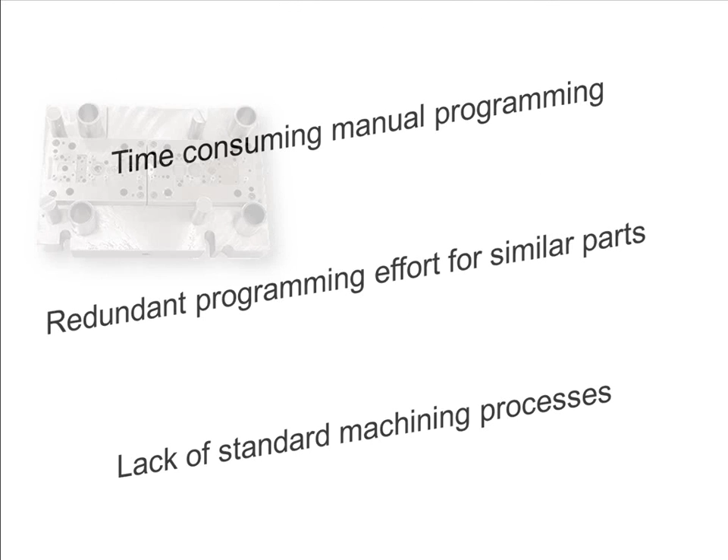Mold and die tooling structures are typical examples where parts can have many similar features, such as holes and slots. Let's take a look at this mold plate that has many slots, pockets, holes, and corner notch features that need to be programmed and machined.

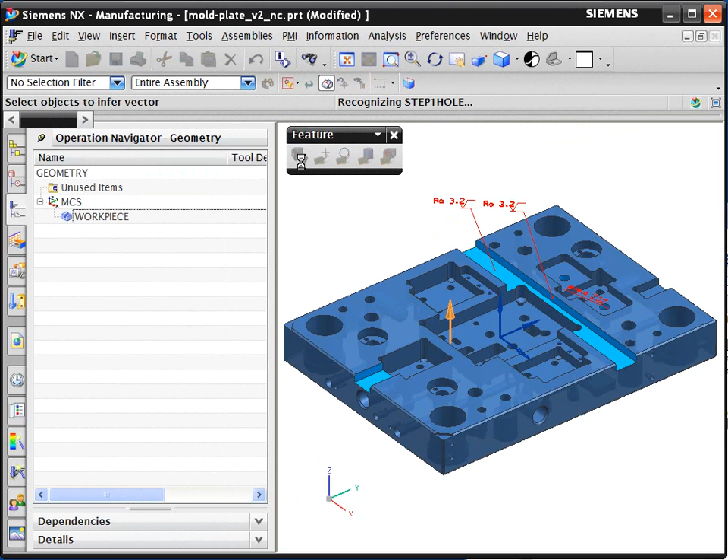The first step in the process is for the system to recognize the machining features. In an automated process, the 3D geometry that can come from any CAD system is analyzed and checked for feature types. Here we see the system stepping through the recognition process. The system can address a wide range of feature types.

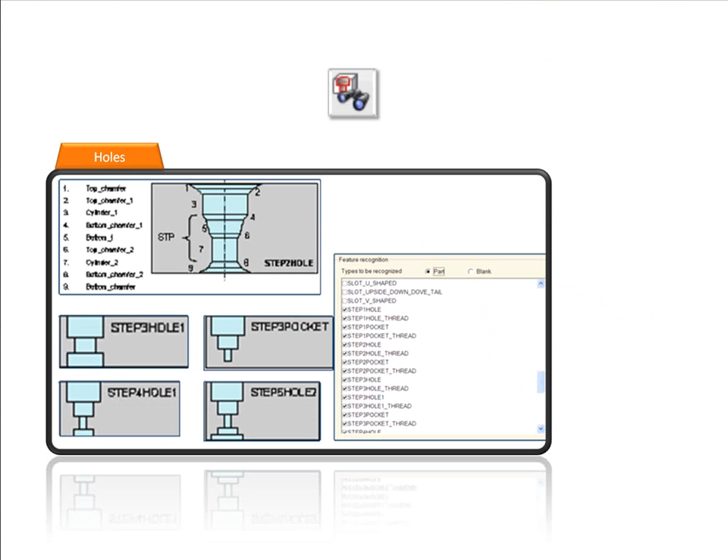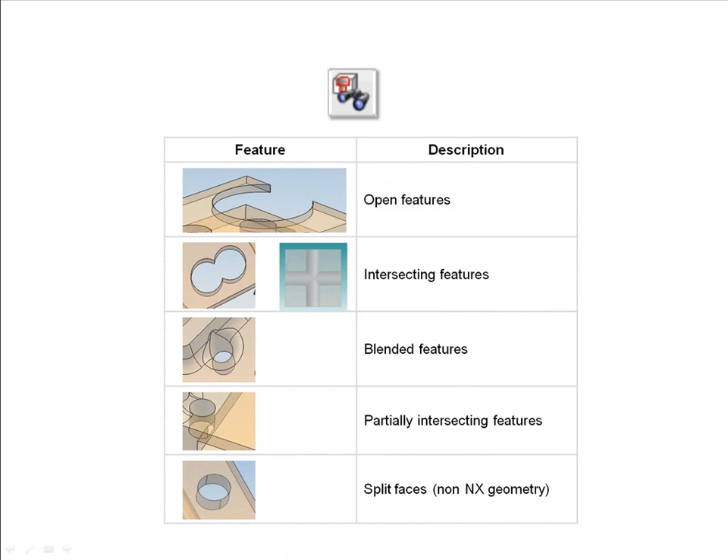The standard system provides more than 70 feature types classified under groups such as holes, slots, notches, and pockets, with the option to add more features that you can define. The system can address complex configurations of the standard features, such as intersecting holes or open pockets.

NX CAM displays the recognized features in the Feature Navigator. You can browse and inspect these from the Navigator or directly on the part. The key attributes of the recognized features, such as location, dimensions, and tolerances, are also displayed in the Navigator.

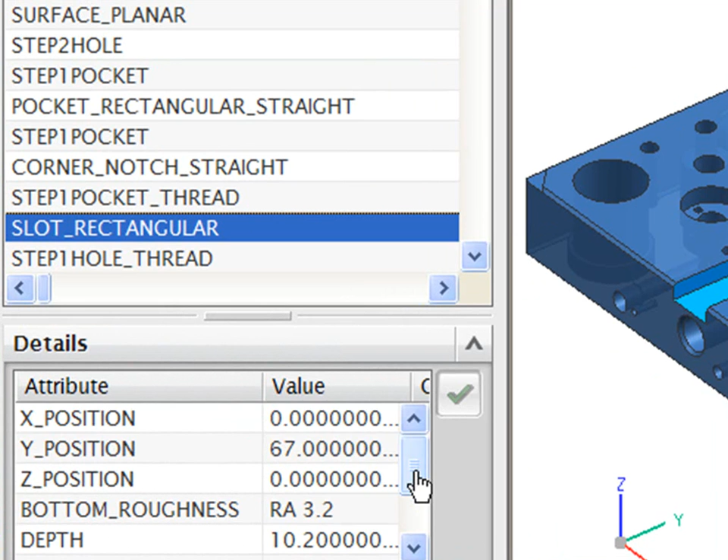The second stage is the building of the machining process for the recognized features, such as these pockets and slots. In this critical step, the generative feature-based machining in NX automatically determines the best or preferred machining process for each feature.

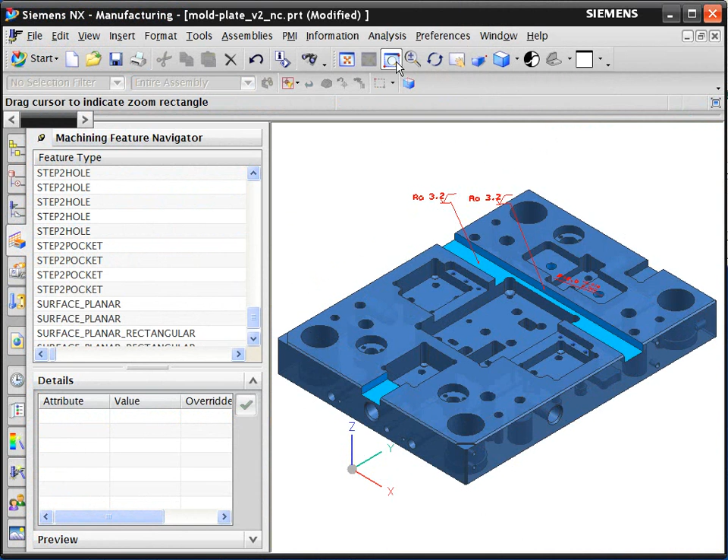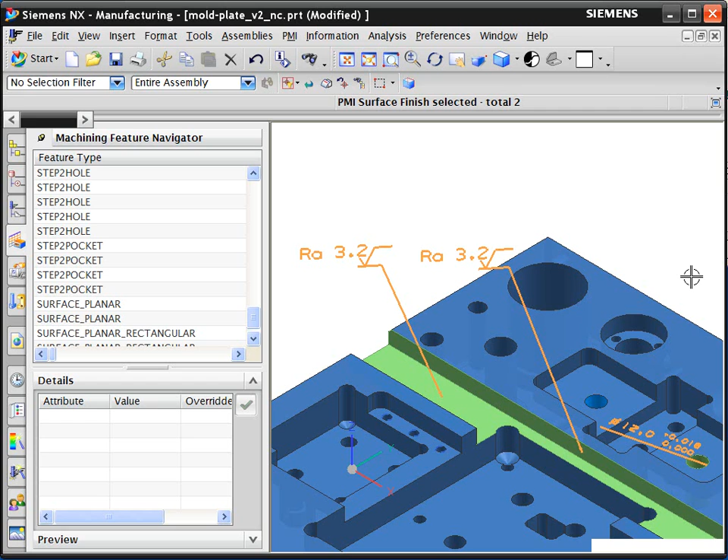When the system builds the machining sequence, it can also use non-geometric data, such as tolerances and surface finish values. These are typically attached to a 3D CAD part model during the design process. This product and manufacturing information, or PMI, is shown as annotation on the part model and can drive the machining method selection. Let's take a look at the system building the machining process for the features it has recognized.

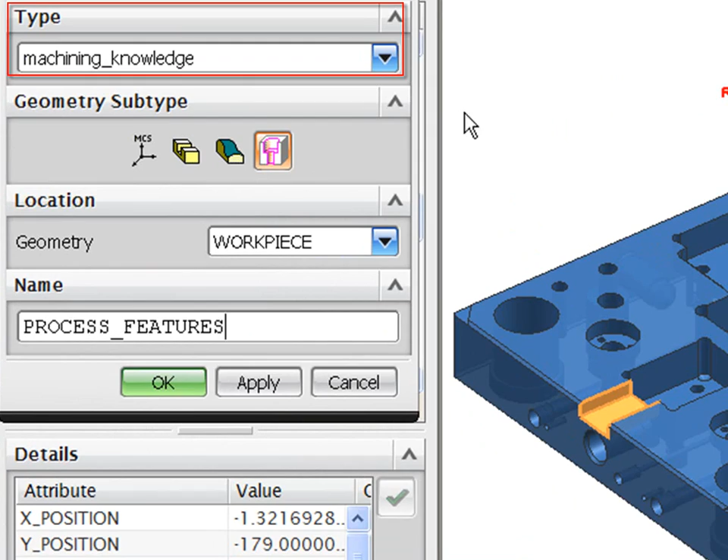We could generate operations for all the recognized features in one go, but for this example, we will just process the data for these slot and hole features. The system automatically builds the machining process from information maintained in the Machining Knowledge Library.

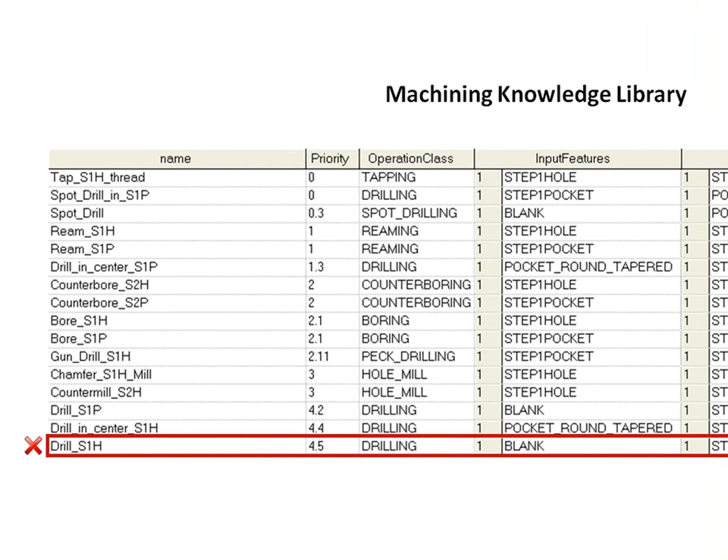The system considers requirements of this feature and tries to select the operations that are the best fit. It can be set to meet objectives, such as finding the least expensive processes. In this case, the tolerance requirements for this feature that were read from the 3D model force the system to ignore the basic drilling options and select a boring operation.

The system proceeds to automatically generate the sequence of operations needed to machine this whole feature. It selects subsequent operations from the library until the process is complete. In this case, 3 operations are needed to make up the machining process.

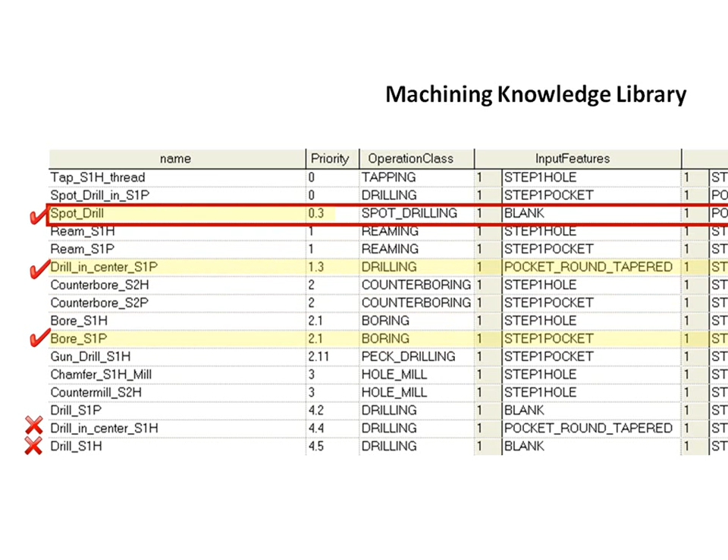This special method of combining individual operations from the machining library makes the system very flexible. It avoids the need to manage thousands of preset machining method templates. Let's take a look at the automatically generated machining operations in the Operation Navigator.

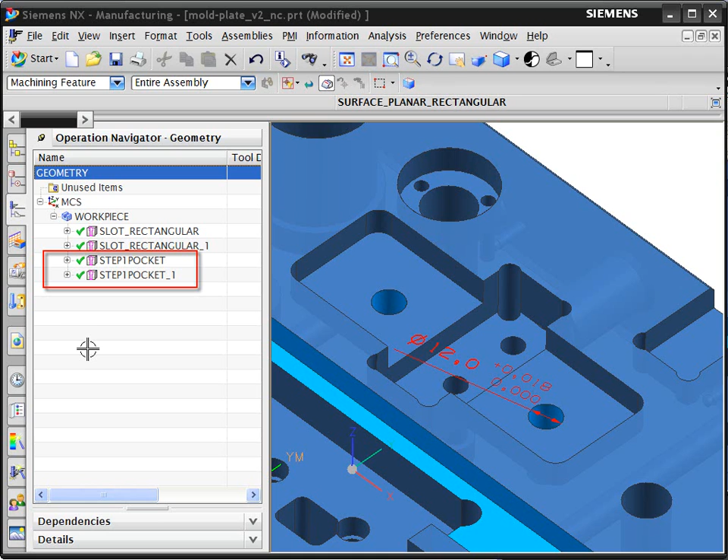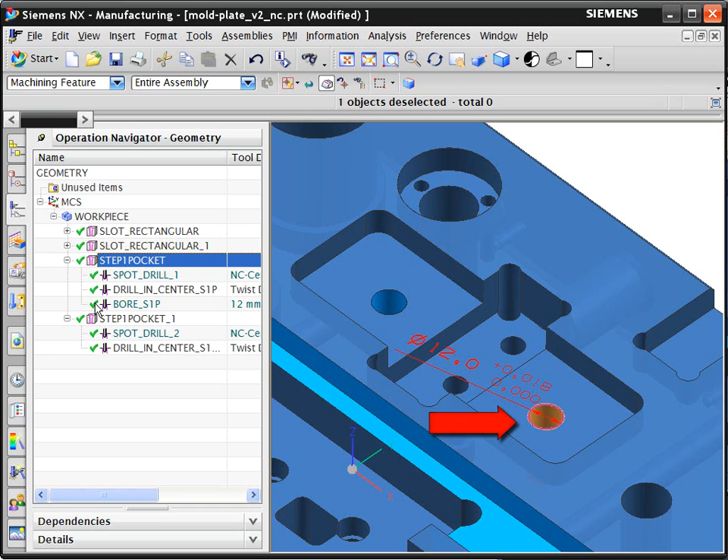These 2 hole features have the same size and geometry, but one has special tolerance requirements, as shown on the 3D model. The first hole, with no specific tolerance information, has 2 operations in the automatically generated machining process. The second hole is one that has a tighter tolerance and requires a specific finishing process and tool. Thus, the system added the higher precision bore finish operation to the machining process.

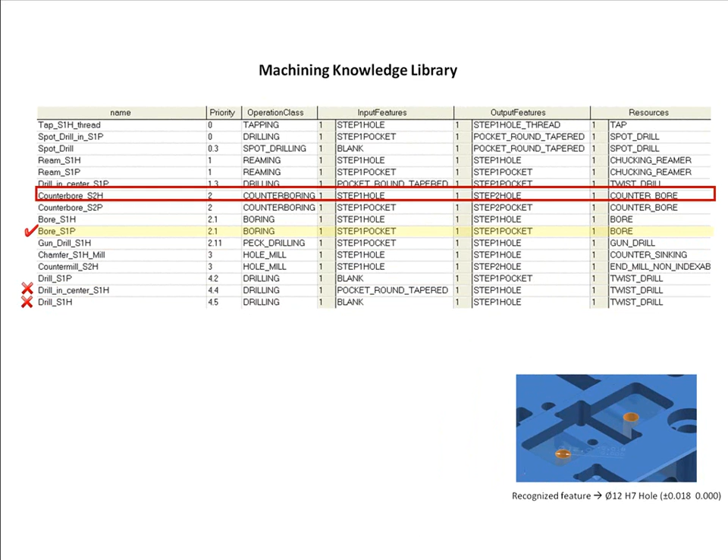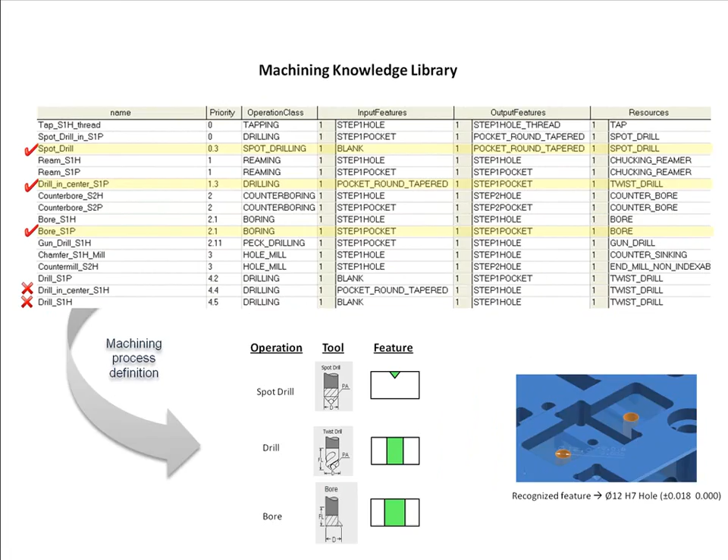As we have seen, the feature-based machining in NX CAM uses a special approach to generate the machining process for each feature from a library of standard operations. This generative approach avoids the need to build and manage a complex set of machining templates, as seen in many systems. In addition, the system allows us to use PMI 3D model data to drive automated NC programming.

NX CAM customers report a 90% reduction in programming time using feature-based machining. The feature-based machining capability is included in a number of the standard NX CAM software packages. It is also available as an add-on module.